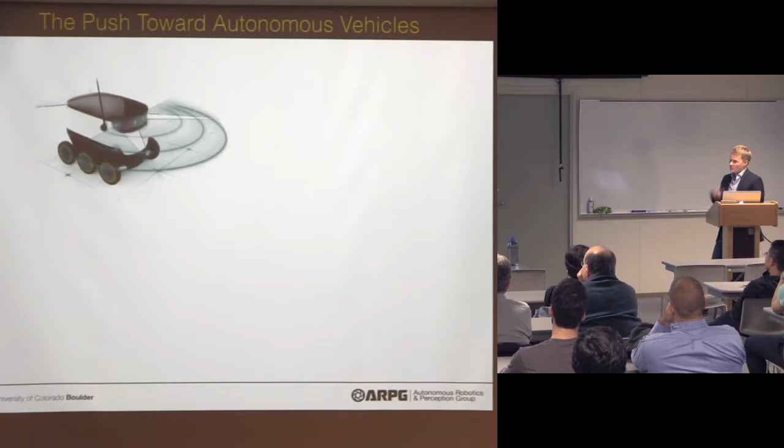So this is one robot, from Starship Technologies, founded by the same people as Skype. Basically it can go for a 3 mile radius around one area. It's pretty impressive, but as you can imagine, driving on the sidewalk and waiting for good weather is kind of different than those on-demand activities, like getting people to work. So that's just one thing to bring up.

And then also there's these parking considerations. If you've thought about what a fleet of autonomous vehicles would change in our daily lives, here's a picture of Ithaca and all the different parking structures you could pay for using the Park Mobile app. Basically every single one of these would likely be unnecessary, or at least all but 5% of them, because the cars would have far more usability and would constantly be in use. All they would need to do is park at night, essentially, when no one's using them.

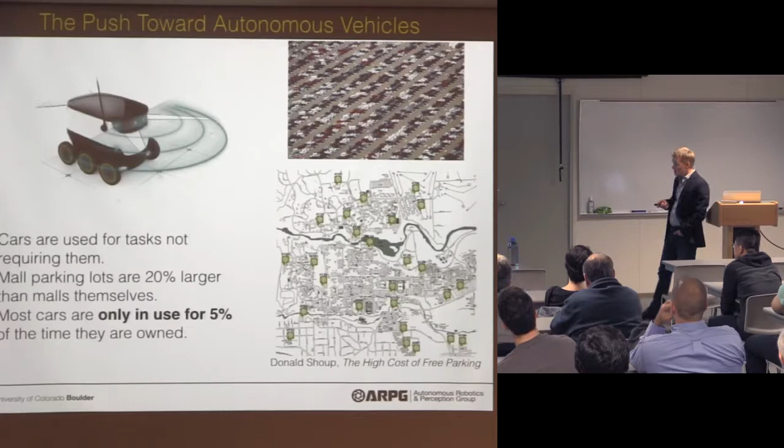So some really sad facts about cars in general: mall parking lots are 20% larger than malls themselves. Most cars are only in use for 5% of the time that they're owned. And frankly, most tasks don't rely on cars at all.

And then the federal government is also pushing a lot of money through, $4 billion to be spent over the next 10 years. The hope is that 25,000 deaths could be avoided just by trying to get people out of the car when they're making less than adequate decisions. It's not so much that we think humans are bad drivers. In fact, humans tend to be pretty good drivers as long as they're not looking at their phones, as long as they're not tired, and as long as they're not drunk. So when we look at the kinds of standards we'd like for our own self-driving vehicles, a human on their best day is pretty much as good as we can get.

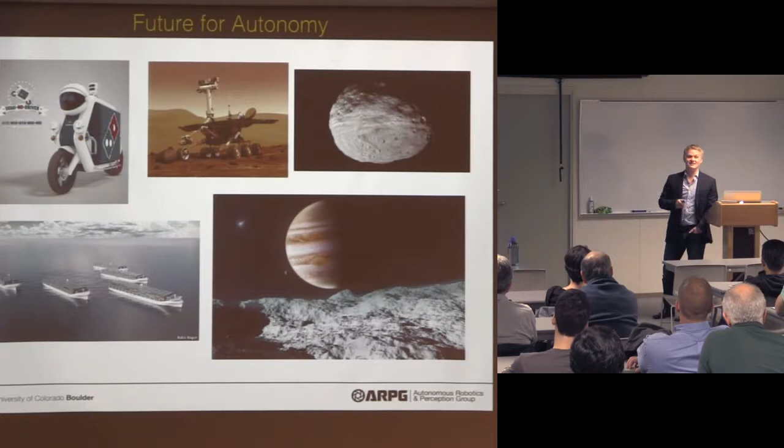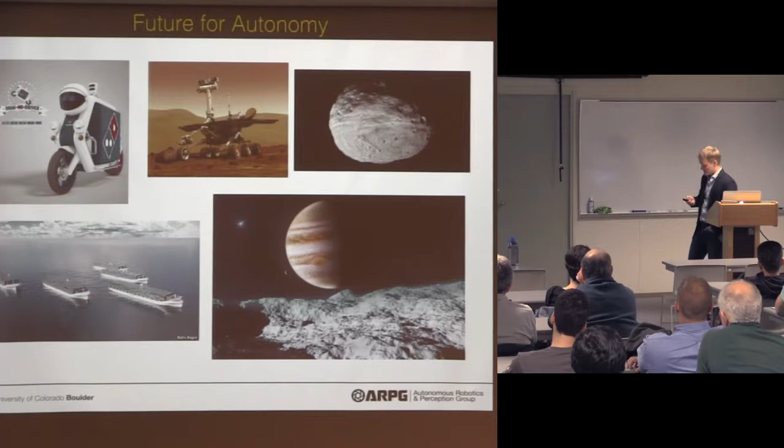I've kind of alluded to this so far, but now I'm going to spell it out. The biggest challenges associated with full autonomy are perception—the ability to actually perceive the environment using low-cost sensors, or at least some sensors we can send up or deploy on any kind of robotic platform.

We have the control problem. How are we able to navigate a surface like Europa when it's all icy and there might be jagged edges? How do we model the dynamics of some vehicle driving on that surface?

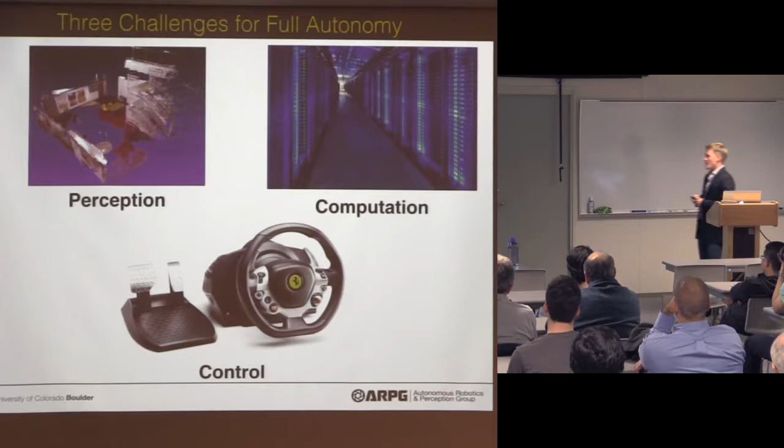And then finally, compute, which we can't rely on. We can't rely on having unlimited compute, or that at some point compute will scale such that we can run these algorithms, because frankly we might not have that kind of chance or choice in the case of going to these extraterrestrial circumstances.

This is not what Uber is doing when they send their cars out on a sunny day in Pittsburgh. This is not what Google's self-driving car does when it's driving around Mountain View and Arizona, where it never snows, and they can basically just test it on sunny days. What we're interested in are cases in which you might lose control of your vehicle—so there's an icy road and you want to be able to detect and respond to it appropriately.

And then finally, what happens when one of the changing models, or a model, changes? For instance, we get a flat tire. I highlight two graduate students of mine that are helping me on this project, as well as some of our funding agencies that are supporting this.

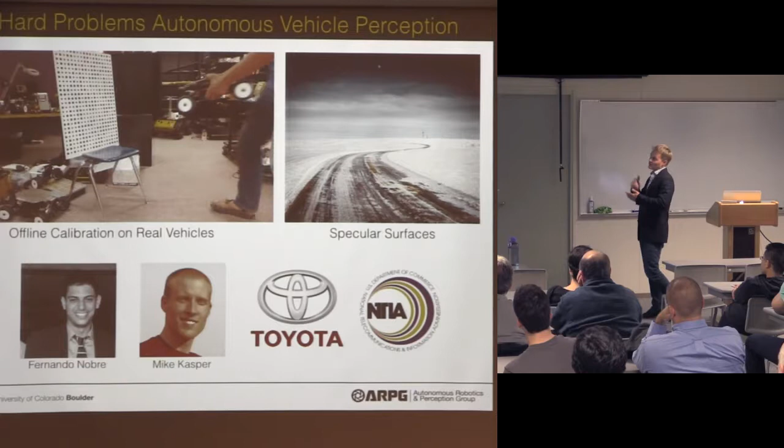I'm also going to talk about this one problem related to the offline calibration of current sensor systems. For those of you that work with any perception algorithms, this is actually a really, unfortunately, common occurrence in which you take a robot, no matter how large it is, and you wave it in front of a calibration target in order to determine intrinsics of the lenses, to be able to figure out how lens distortion comes into play, how spread apart these different sensors are, the cameras and the inertial measurement unit on board. And what happens if, for instance, something bumps and all of a sudden those calibration parameters come out of whack.

And also this specular surface situation, again, icy roads being a really great example. Specular surfaces are surfaces that reflect light, so you can imagine a mirror as a perfect example. These tend to be challenging because then we can't even determine whether or not it's a surface we're looking at or a reflection. So how do we programmatically determine that?

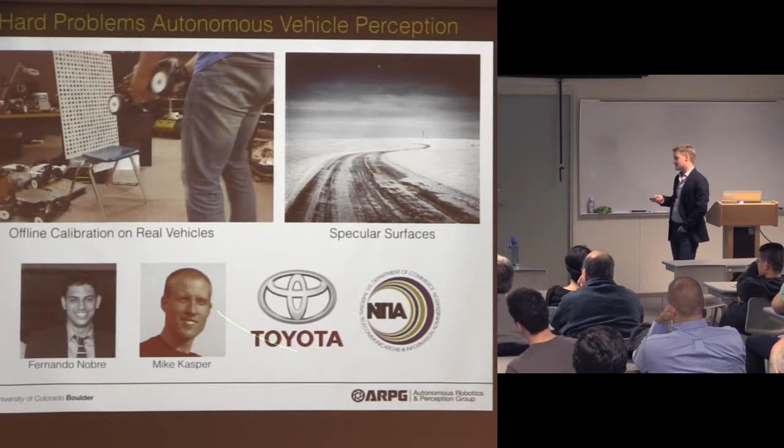Two students of mine who have been aiding me on this project, Fernando Nobre and Mike Kasper, will be graduating within the next 2 years, and then some of our funding agencies, including the Department of Commerce. Why are these problems unsolved?

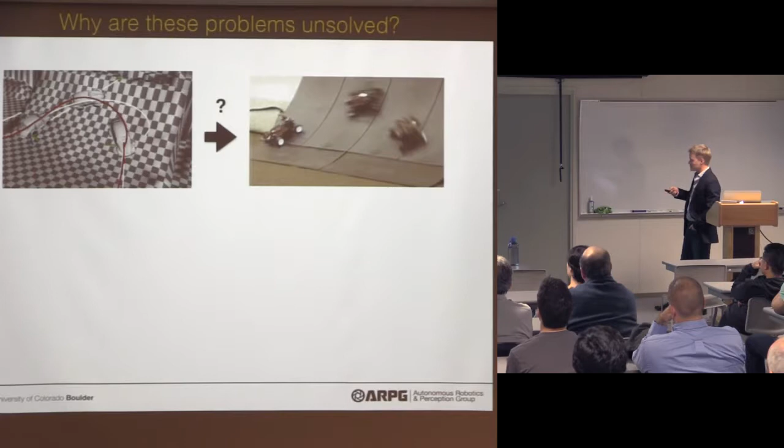Well, we can do as much as we want in simulation. Putting it on a real vehicle is actually really challenging for these, because real life is not this, it is more like this, as we are seeing right now outside.

Not only that, but many of these sensor vehicle environment parameters must actually be estimated in real time. So what do I mean by real time? This is a very important consideration. It means, at least in the context of this conversation, I mean in constant time. That means that if we're willing to do it on our computer, that's fine. That just means the problem can't scale with any parameter that we're trying to estimate, or with any sort of difficulty or challenging situations that we're going to be incurring or applying our algorithms to.

So for instance, we need to estimate, as I mentioned before, lens intrinsics, some radial distortion parameters, as I'll indicate in a little bit, biases and different kinds of standard deviations of noise on our sensors, as well as vehicle environment parameters, things like any conditions or any kind of parameters related to changing vehicle road conditions. You can think of tire damping parameters, braking force slope as being part of that. And what I mean by this particular area is, if we're operating in any kind of environment, we need to be able to estimate what that parameter, or what that environment is, in order to apply control to it.

So I'm going to start by talking about this vehicle control situation, and lay out this one kernel of an idea that we would like to solve. That is, we would like to drive a real car over some terrain park with some challenging features in it. For instance, there might be a jump right here, there might be a loop-the-loop. This is obviously not indicative of a real driving scenario, but it's challenging enough such that if we can do driving here, we would like to believe that we can do driving in most other circumstances.

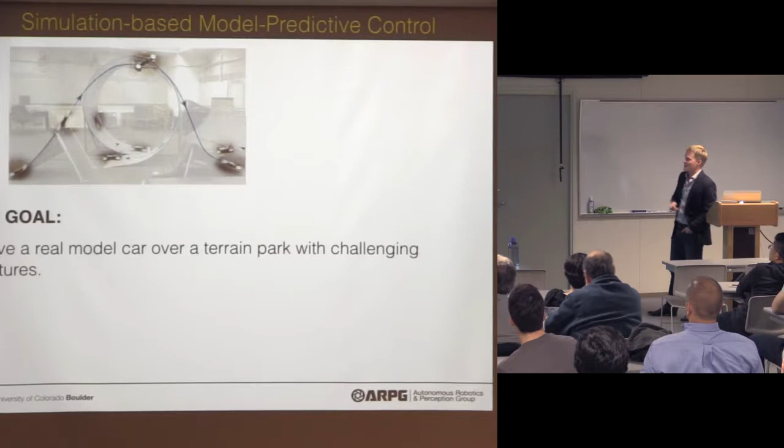And the approach that we're going to take is we're going to capture a model of this terrain park and then determine how a simulated car would drive over it. And then if the car that we're modeling is similar to the car in the real world, then we'll just send those commands that we're calculating on our computer over to the car. And we want to see how that works.

Now, there are a lot of concerns that one might have about this approach. For instance, what kind of high-order model do you need in order to simulate real car dynamics? Or maybe, are perturbations from the car model going to actually approach this real car that you're going to be driving? And as in robotics, I'm going to suggest that we run an experiment and answer that question through the experiment. Okay.

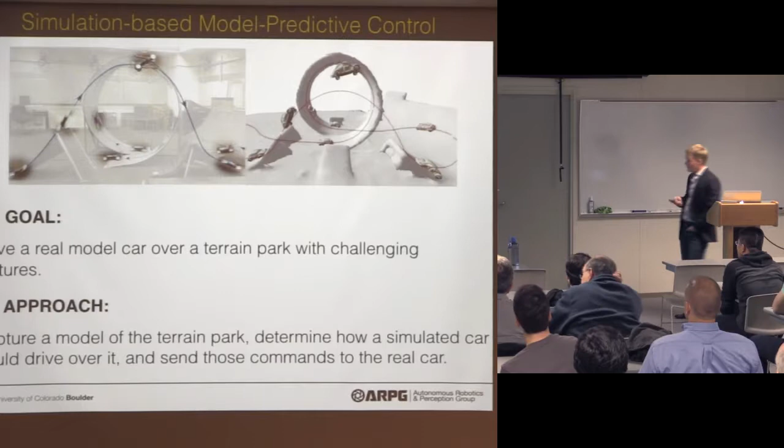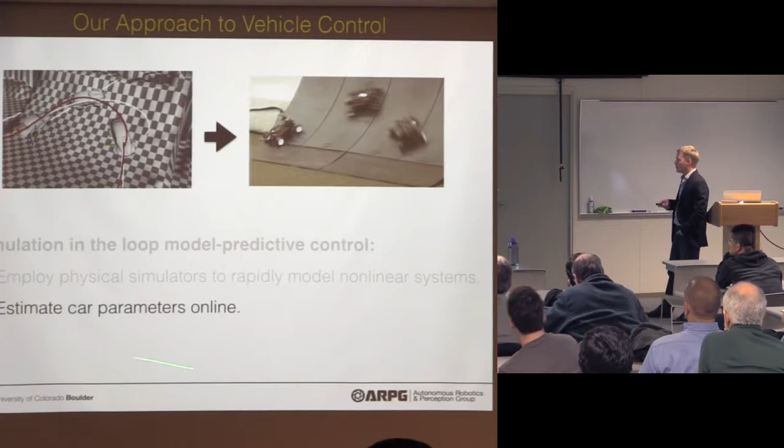Our approach uses simulation and receding horizon model predictive control. First, we'll employ a physical simulator that will rapidly model any nonlinear system we give it, in particular this high order car model we wish to model here. We're also going to estimate car parameters online, all those different vehicle and environment parameters I mentioned before.

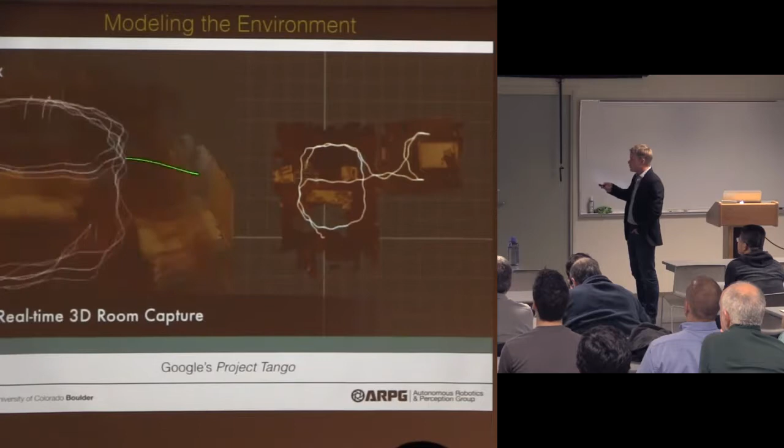A quick primer: I mentioned I'm going to scan the environment using an algorithm that's been well known in the computer science community for the past three years or so. What's going on here is one takes a Microsoft Kinect and walks it through a room and series of rooms, generating this 3D world environment. This 3D environment exists in your computer in a scale-correct way, and as we walk through with this sensor, if we have a 3D model, we can simulate physics in this environment.

We've applied that algorithm to data we've collected from the Kinect, and we went ahead and decided, okay, let's put a car down and tell it where we want it to go. We drop these waypoints, and I'll explain how these different paths are generated. But at least if I start physically simulating the car in this environment and say I want you to be able to jump, and give me ideas of how you're going to jump, this is the result. Clearly we can make a car physically simulate jumping over a certain feature.

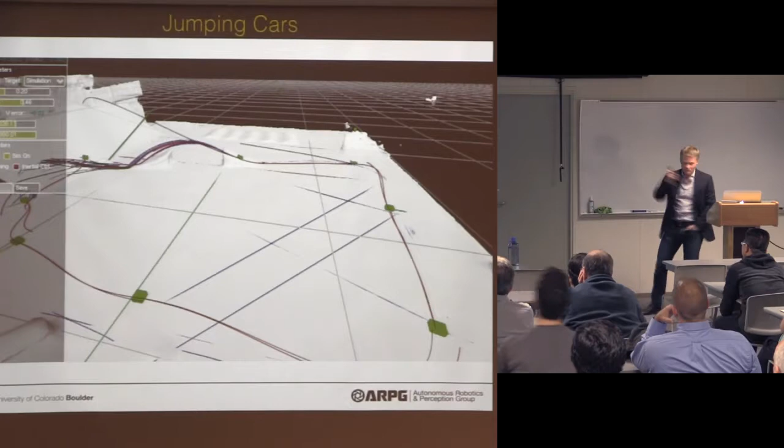Is this video on loop, or is it going around and around? Oh no, this is actually going round and round. It doesn't look like the model's improving as it goes, like the explorations are not converging. Not converging how? There's a spread as it looks forward. The spread doesn't get less as it goes around. So you're probably asking about online parameter learning or something. I thought you said that a minute ago. Yes, I did. The online parameter learning we're doing is associated with this terrain. In this case, I fixed the parameters.

I'm not doing any learning in this example, so I should mention that, and I have some demonstrations later about results for online parameter learning. However, I basically just wanted to show this one example of what's going on, and in particular I wanted to show these control candidates as they're being generated.

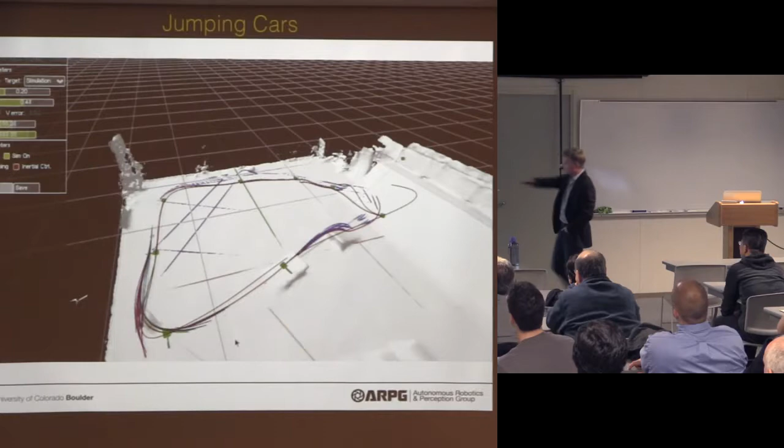Let me quickly show this again. You'll see these lines shooting out from the vehicle. What's happening is we're forward simulating the dynamics of the vehicle, looking ahead about 0.2 seconds, solving the boundary value problem associated with this vehicle to try to regress it towards this red planned line. These control candidates are generated at about 100 hertz, which means we can generate forward-looking trajectories extremely quickly and regress them to learn the correct control candidate, then apply that to the vehicle.

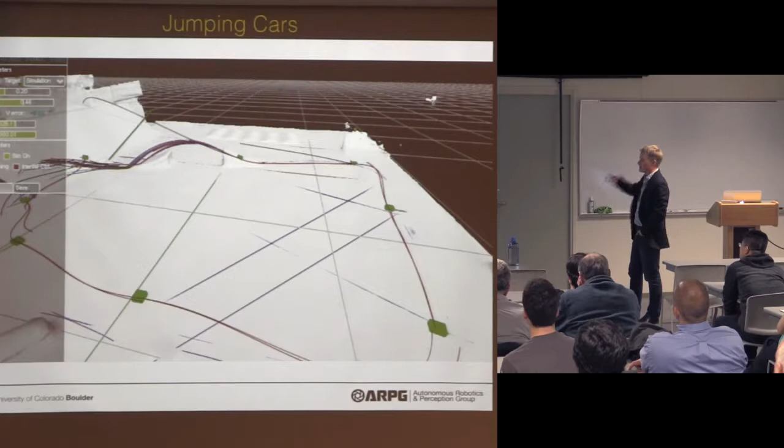That should answer part of your question, but not the physical parameters question. So the problem structured here: we have a dynamics model of this system, and we're trying to solve this series of boundary value problems. Like I mentioned, we drop waypoints, and we ask how do we get from this current waypoint to the next waypoint. We also have non-holonomic conditions that relate to certain constraints we have on our vehicle.

So just to go through here, we have the system dynamics as modeled. There's the state of the vehicle, and there's also an environmental parameterization, something like those parameters that we might be trying to estimate online associated with the environment, things like coefficient of friction between the wheels and the ground. We also have that at time t alpha, some time into the future, we would have a state of the system at waypoint alpha.

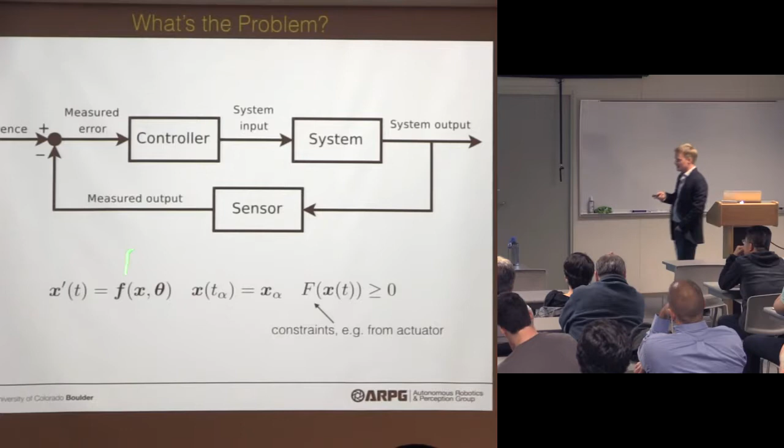And I mentioned some constraints, e.g. from the actuator. You can't turn that quickly on a car, and you can't express those conditions necessarily as this vector field, so we need to have some of these non-holonomic conditions. All right, so there are some challenges associated with this, and I want to be upfront and very clear about it, because as with all methods in robotics, the hope is that this works, and there are cases in which it doesn't, and we should be clear.

So F is nonlinear, very high order. We basically are deciding to model this as high order as we want. If we choose T alpha in a certain way, this boundary value problem may not have a solution, which means that we'll do a regression algorithm on a problem that has no solution. Also, these generally require some sophisticated numerics, which would result in non-real-time behavior. So that's obviously a problem, and we need to address that directly.

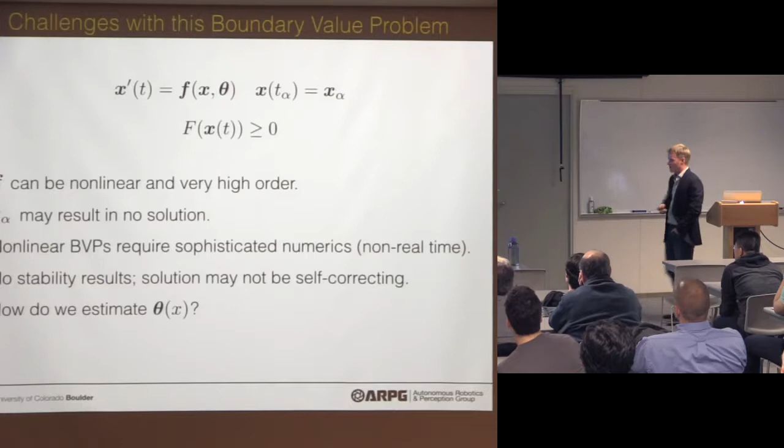There are no stability results on solutions like this if we are using a numerical solver, and that means that the solution may not be self-correcting. If you are slightly off from the reference trajectory, then you could drift away from it for a long time. And finally, how does one estimate this theta of x, which Andy Arena just mentioned, I believe.

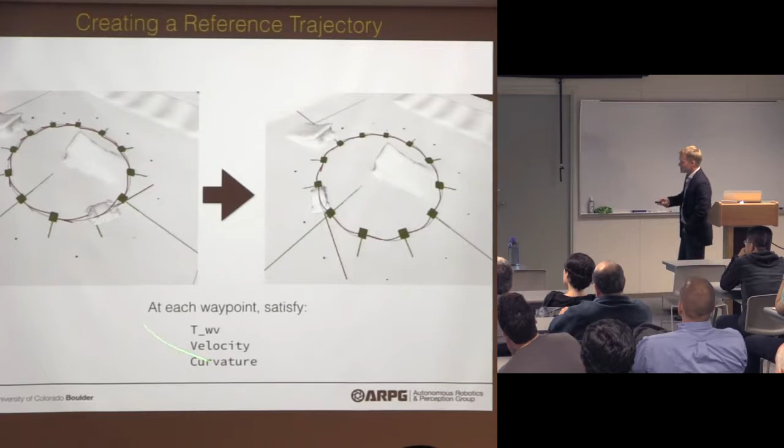Okay. So first, we create the reference trajectory, which I've referred to a few times already. We drop these waypoints. We say that at each waypoint, we are going to satisfy some pose, which is x, y, z, roll, pitch, yaw, velocity, and also a curvature constraint that's related to essentially how the wheels are turning at that one waypoint. And this can be solved by employing this physics simulator, as I mentioned before.

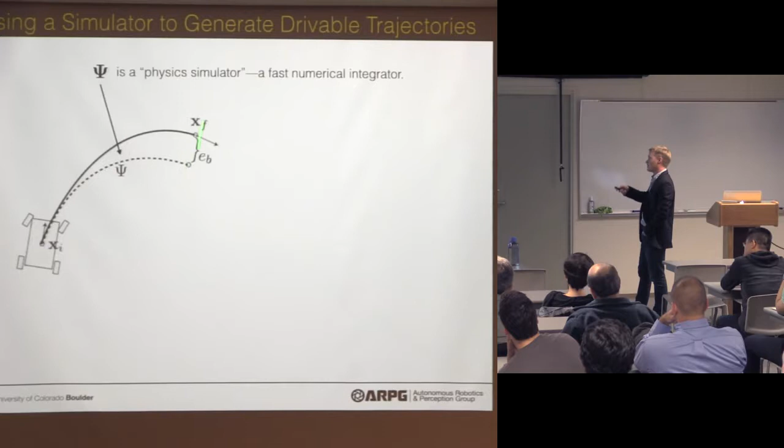So assume that you have some waypoint of your vehicle, x sub i, and that you're trying to get to this next waypoint, x sub f. We employ the physics simulator in order to forward project dynamics over a certain time length. And what we might end up with is some trajectory that does not exactly get us to this x sub f. So what do we do? We use optimization on this problem. We're trying to drive e sub b to 0, and we set up this residual.

This box minus operator is related to an SE3 pose difference. Note that in XYZ, it's just going to be a difference between the degrees of freedom, x, y, z, individually. But if you're trying to take a difference between roll, pitch, yaw, then that requires some more sophisticated handling. And for each waypoint L, we're going to solve, quote unquote, this boundary value problem via parameterized curve, which I'll explain in one moment. And then we're going to minimize this e sub b.

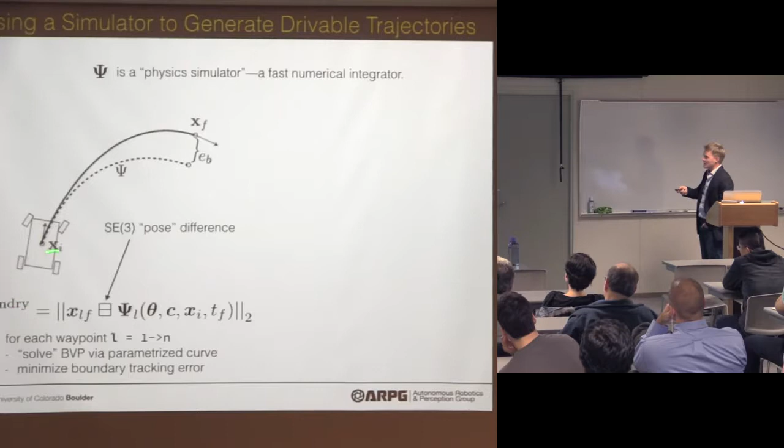So we're setting up an algorithm that hopefully will get us correct control inputs C in order to solve this problem, with everything else being constant. So what are you using as the boundary value solver? So the boundary value solver is actually a forward projection of dynamics in time, and then Gauss-Newton optimization on this residual e sub b, using as a parameter optimization set some parameterization for the control signal. And in this case, we use Bezier curves.

If we use fifth order Bezier curves in space and in velocity, then we can fully define all of our angles associated with the rigid body motion and solve this problem in only a 5-dimensional space, which is a lot easier than trying to solve the finite difference problem. We tested out a bunch of different curves. Spline curves, for instance, result in too high of curvatures, so we went to Bezier curves because they demand a nice smooth curvature change with minimum curvature.

We can explicitly say that certain kinds of maximum curvature bounds exist on a Bezier curve, so it turned out that that was sufficient. Other people use Dubins paths in order to solve these non-holonomic vehicle problems. And can the control signal steer angle? Yes. So I should mention there are two inputs to the system. With any car, we can steer it, and we can put our foot on the gas. We can also brake, but I'm ignoring that for now.

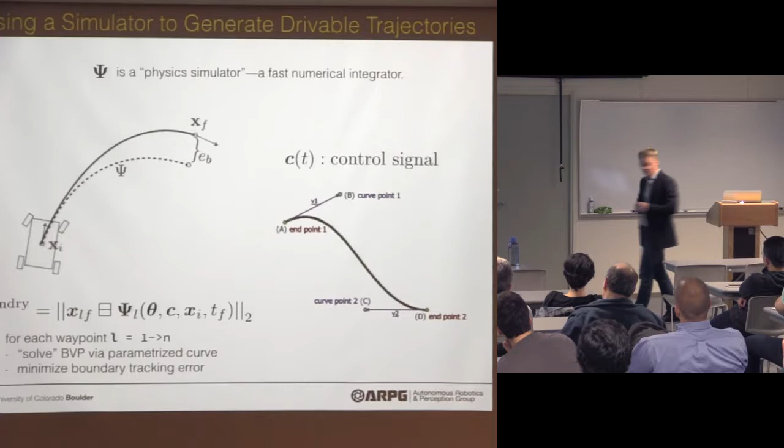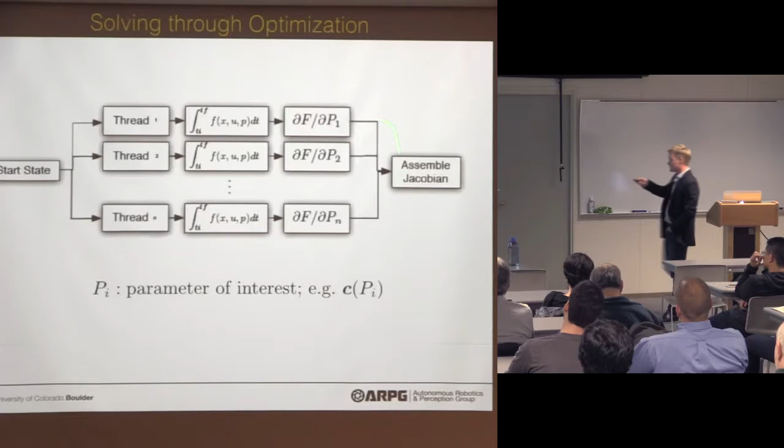So those are the two kinds of control inputs that we have: voltage across the motor, and then turning rate or turning angle. Okay. So we can solve this problem also in multi-threaded fashion. Basically, you can do this integration of dynamics on each degree of freedom for the optimization. So this control signal, as I mentioned before, is now parameterized according to some p value, so just a number. And we can, for each different number, run a physical simulation and use finite differences in order to calculate a Jacobian and invert that in the end in order to solve for that optimization problem, which is exactly what we do.

And so we set up this control problem such that we're trying to move our vehicle to this reference trajectory, but over time, future time horizons are going to be downweighted, and mostly we're going to be looking at this error in tracking this trajectory as it's temporally relevant, the moment that we're in right here. Okay. So we set up this other residual that's associated with trying to minimize the control problem, which was what was being solved by those candidates that were being shot out from the vehicle before. Okay. And like I said, we can solve this problem at 100 hertz. Turns out we only need to solve the other problem once in order to generate that reference trajectory, as long as the vehicle parameters aren't changing.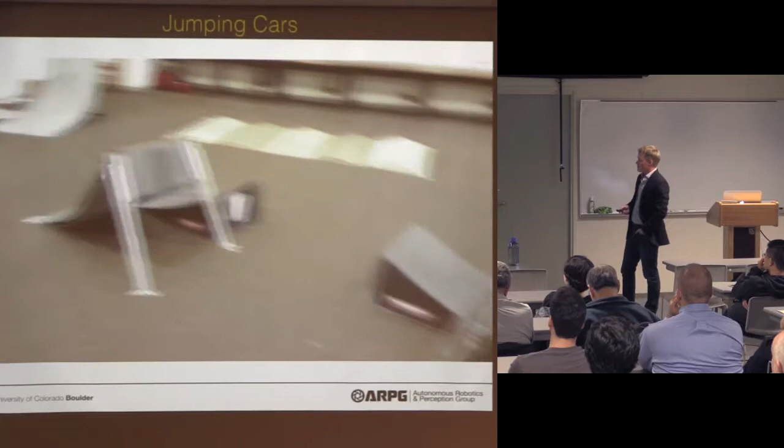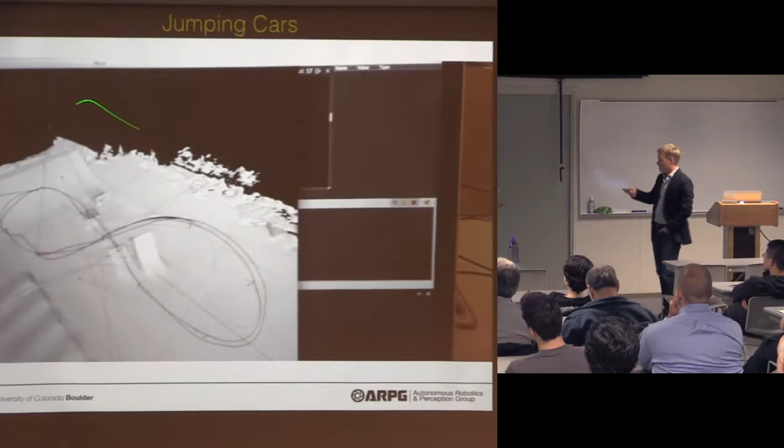Okay. So moving right along, I want to show you what this looks like when we actually put it on the vehicle. Because all I've done so far is sort of demonstrate to you that, okay, we can go ahead and apply or calculate these different reference trajectories, as is going to be shown on this software cutout right here. Here's the reference trajectory. Here's the vehicle with state feedback being provided by a motion capture system in our lab. And essentially these control signals are following this reference trajectory and being calculated at a very fast rate, such that state feedback is immediately being included in the system.

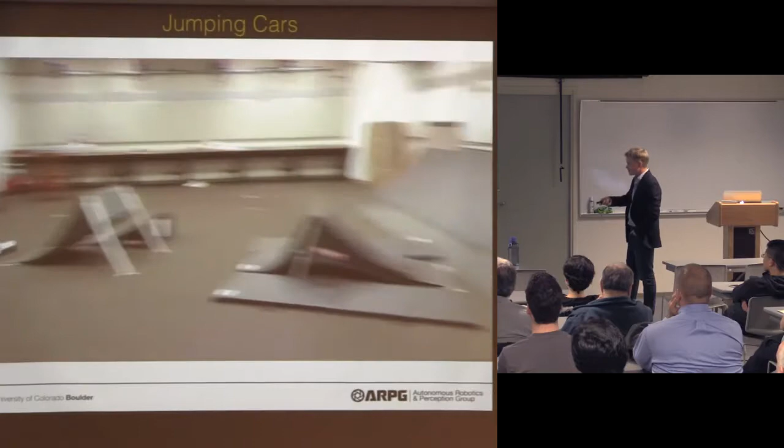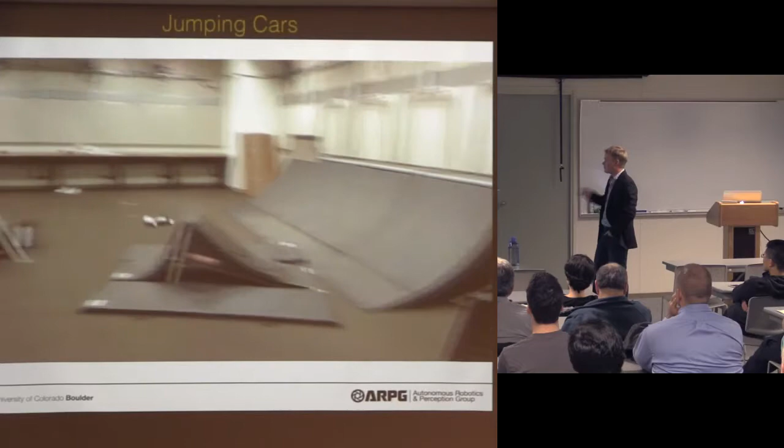All right. And so at least in accomplishing something simple like jumping, this might sound kind of uninteresting, right? Well, at least for that low jump. For the high jump, we have a different story. So what we've done is we've placed a waypoint on one jump over here, and then this other jump right there. So a human operator might be able to land this vehicle without crashing it. A human operator is less likely to be able to actually land on this opposing jump repeatedly. And so this is the kind of behavior that we'd like to see, and we're kind of happy about it.

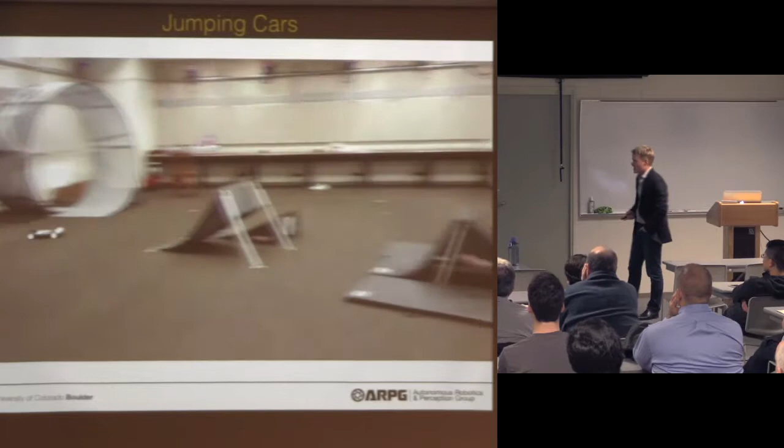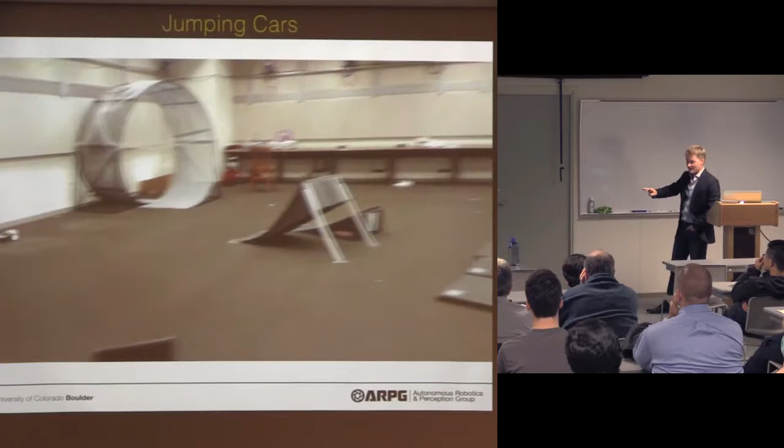One thing that is actually not present in this video, that I can actually show it to you afterwards, is there's some audio with this video. You can hear that on this vehicle, the rear wheels are spinning as it's landing in order to stabilize it so that it's pitched up as it's landing and the rear wheels fall first. And that is not some sort of behavior that we programmed in. That's actually what the physical simulator is telling us we must do in order for us to stabilize the landing.

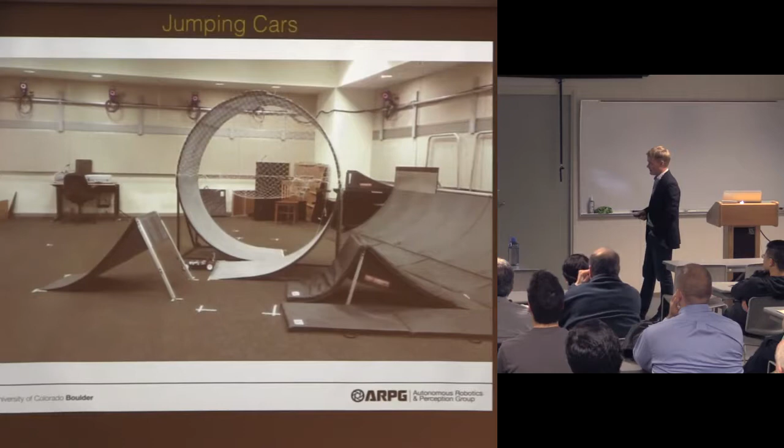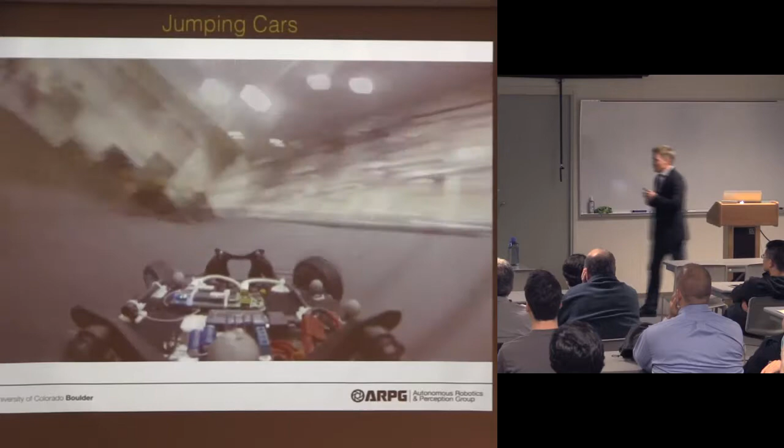And so this is sort of the last segment of this one little video right here. And as we go through this loop, okay, it can go through a loop. Well, you know, maybe a human operator could do that. Let's look at the front wheels as it's going through the loop. You'll see that there's a massive stabilization that occurs that is generally outside of the realm of what maybe a PID controller would give us. And certainly it's operating in a fast way. So we know that at least this method appears to work.

Now, I should also mention one thing, that the state feedback was provided in that video by these cameras, what I called motion capture before. The motion capture obviously loses tracking as it's going upside down, and in parts when it's airborne. And so there's also an inertial measurement unit on this vehicle, and we're forward integrating those measurements coming out of it, which is going to be the topic of my next section.

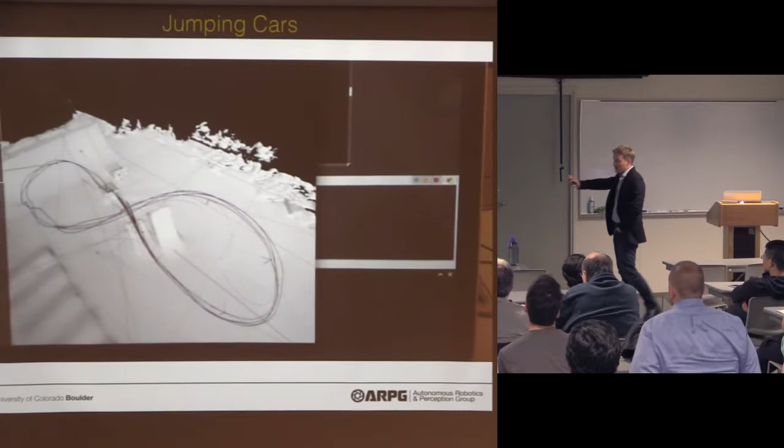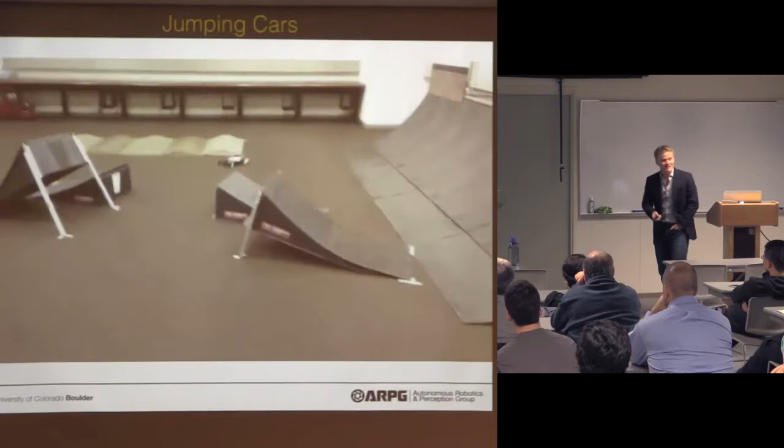But at least for now, this is the control problem as we're solving it, and we're looking forward to new ways of explaining this as it relates to real vehicles. I realized that I did not talk more about online parameter estimation, so I should talk to you more about that later if you like. So sorry about that. All right, so here are some takeaways that we have about that project and things that we want to look at in the future.

So first of all, complex models, they can be used to aid practical behavior, things about landing or skidding. The car was skidding in certain cases in that video. And those models allow us to actually determine how that behavior will affect our vehicle and then send appropriate control signals to it. I also mentioned learning for parameters can be done.

Something that I didn't mention at all so far is that we had to tune that model that we had, and we, in some cases, had to run the car and then use state feedback and do this optimization. I'm very concerned about that method, and this is the kind of method that's being employed by many real car companies right now. They drive their car and they empirically determine a parameter such as maybe the spring coefficient that's on their vehicle. I think that's dangerous because what that means is that we're opening ourselves up to overfitting, and we need to be very careful about that.

Okay, the third thing is for vehicles, some model uncertainties are addressable by state feedback. That is to say, we know we're not modeling the full behavior, the full dynamics of this vehicle, and at the same time, we still can drive the vehicle through these different cases. And so state feedback, I think, is helping us a lot there.

And so future directions, there are these different kinds of driver assists that exist. So ABS is one of them, and then electronic steering is another one, or electronic stability, as it's called by some vendors. These are systems that are generally black box systems.

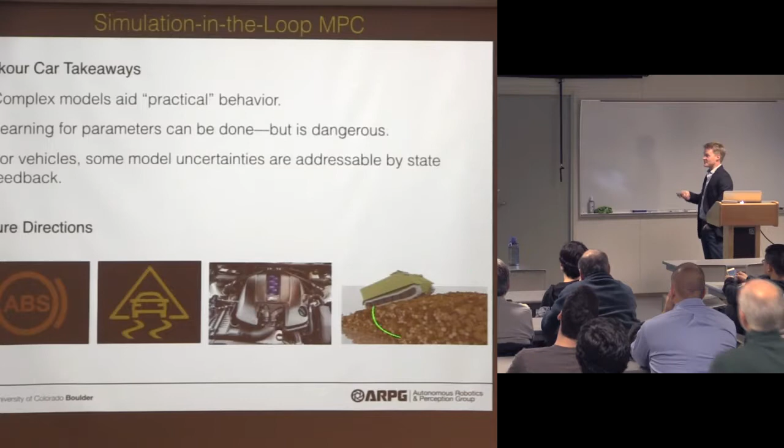So for instance, we do work in part with Toyota, and what they tell us is, some of these systems are given to them, and then they must characterize them in some way, but they're not necessarily given the guiding behavior of these systems. We want to be able to model those systems and then put them on our vehicles so that we can appropriately do planning with them. And then I also mentioned black box engine models, as well as granular materials or other kinds of more complicated physical scenarios in which we might be driving.

Now I want to switch gears and talk about this second difficult problem in self-driving, which is vehicle perception. So vehicle perception is actually the driving difficulty, in my opinion, behind most autonomy. It's the ability for one to relevantly collect data and make decisions based on it from a suite of different sensors. And that is a very general problem.

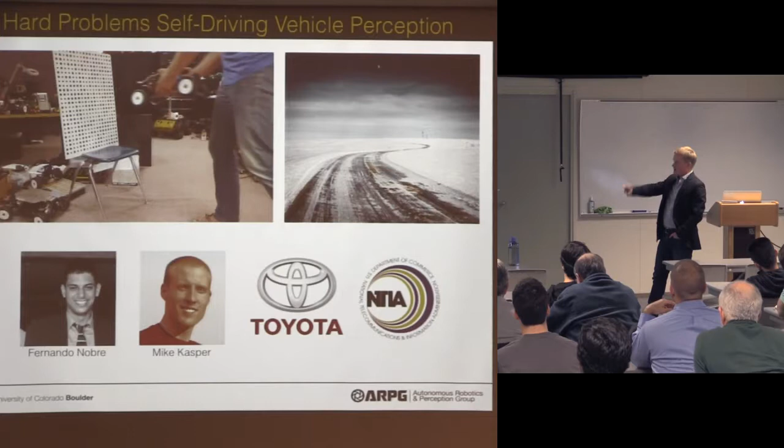I mean, that's the problem that ranges from being able to look at a police officer with his hand out, and infer that means that you're supposed to stop, something that's generally considered a nearly artificial intelligence level problem, although deep learning's gone a long way to try to solve it. The second kind of issue is related to how these sensors even react with respect to one another so that you can know where you are. And so that's one that I'm going to be talking about in depth today.

So this vehicle that's being run through this calibration process that is looped in this case, there are 3 different cameras on it, and then there's this inertial measurement unit. And to talk a little bit about how we would be able to do navigation, I draw this graph here. Okay, so this is a relationship between cameras that are sitting on some vehicle or a robot, and a set of calibration parameters here that determine the offset between, let's say, this camera and then an inertial measurement unit. So this is an accelerometer and gyroscope again. What it does is it gives us data that we can use and integrate in order to get motion estimates.

Typically, as a camera is moving through a scene, you detect some points in the scene and project those into the camera plane, and from there determine where these world points are, things like corners in the world. But the IMU, as it's mounted rigidly to a robot, is also giving you accelerometer and gyroscope measurements, which in part give you the same information as the camera, offset by this transform.

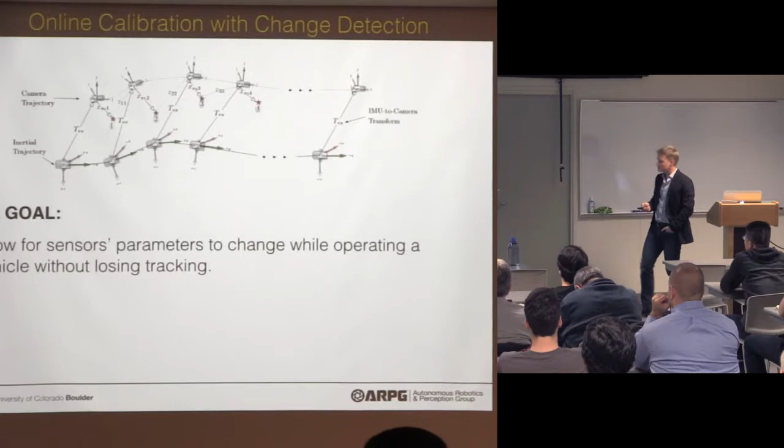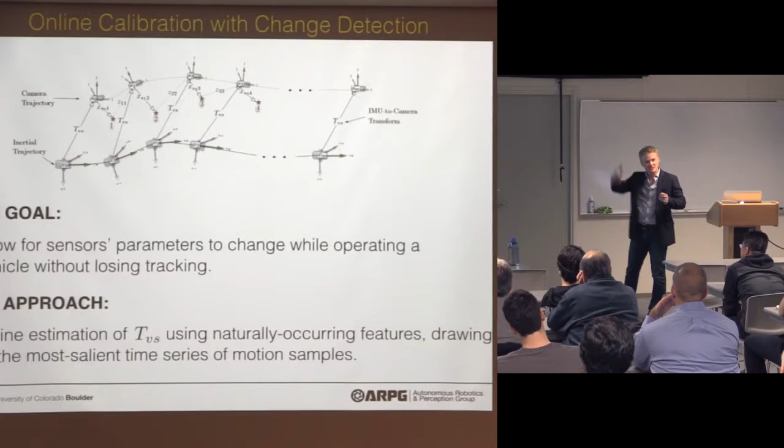Our approach is to do online estimation of this transform using naturally occurring features and drawing on the most salient time series of motion samples. That is, we take large amounts of data with these sensors, and from that time series of data, we cherry pick the best sequences for estimating what those parameters are. Here are some different motivations of why this would happen.

There will always be erroneous driving, even when computers are driving these cars. If you end up slightly jostling the chassis of a vehicle, you cannot assume the parameters of those sensors will remain the same. Not only that, but if they were off, what would happen? Let's say you decided your sensors are out of whack and you're going to stop the car. Sometimes stopping the car is not an option—you could be on a highway, in the middle of nowhere—so there needs to be some system that actually recalibrates these sensors as you're going.

So these are two examples. I showed you this video, and I can tell you that through this jumping procedure, there are portions of this vehicle that are going to be jostled and moved around. Even a millimeter of inaccuracy on a sensor rig, when that is propagated all the way out into some features in the scene, results in a massive error in terms of the state estimation for the vehicle, for instance.

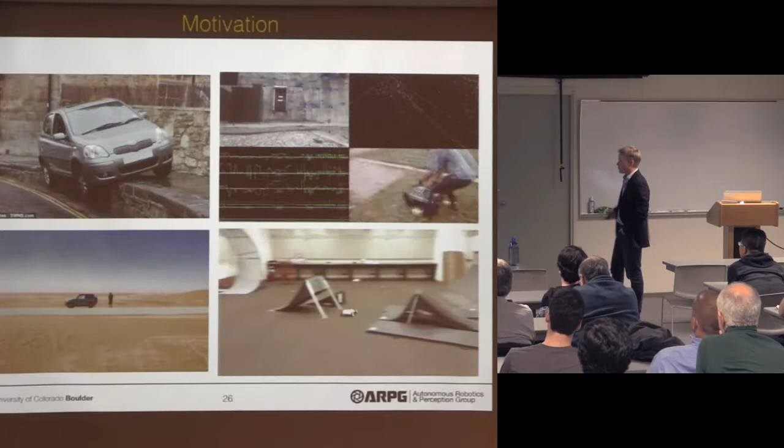And then there's this other example, where one of my graduate students is taking a camera and moving where the camera is on the robot itself. I'm going to get back to this video in just a second.

So, some goals: we want to develop power-on-and-go operation. This is the key of all robotics right now—that we would not be setting up situations in which everything is perfectly done and then all of a sudden we're ready to run our experiment, it only runs once and then we can never recreate it. We want to avoid that kind of problem while also accomplishing the solution to this simultaneous localization and mapping problem.

We also want it to be robust to intentional and accidental changes. We want to be able to easily add and remove sensors from an algorithm like this. And finally, the biggest set of parameters we would like to estimate are the 6DOF transforms associated with the rotation and translational offset of cameras and the inertial measurement unit.

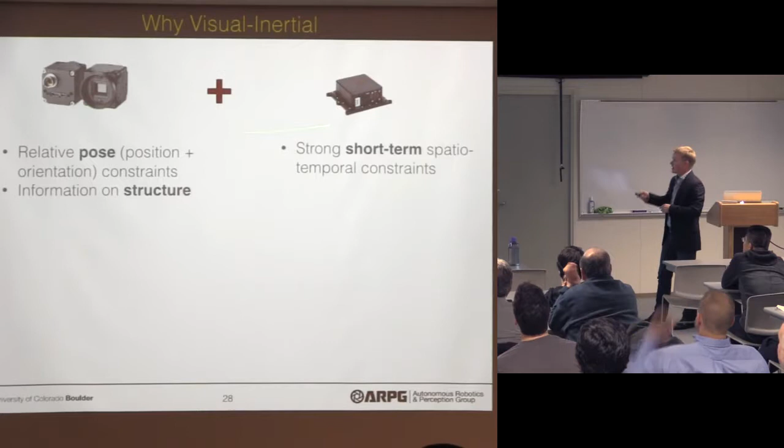So, really briefly, I'm going to talk about these two sensors. One, cameras give you relative pose constraints. That is to say, we're going to be able to look at where a robot is in one frame, slightly move, and then be able to determine where it is in another frame based on the motion of certain objects that are within the field of view.

And it gives you some information on structure. That is to say, we know where these desks are because we're able to look at the corner of this desk and notice that the perspective of this desk is changing when you have a set of two cameras, for instance. So IMUs, on the other hand, what they give you are these strong short-term spatiotemporal constraints.

Why is it short-term? Because IMUs tend to be extremely noisy, even very expensive ones. So while cameras are extremely repeatable and there's a wealth of data, IMU, on the other hand, gives you sort of noisy data, but gets you through these portions in which you're losing tracking. So let's say that it were dark in some area of the scene, or maybe you were looking at a white wall.

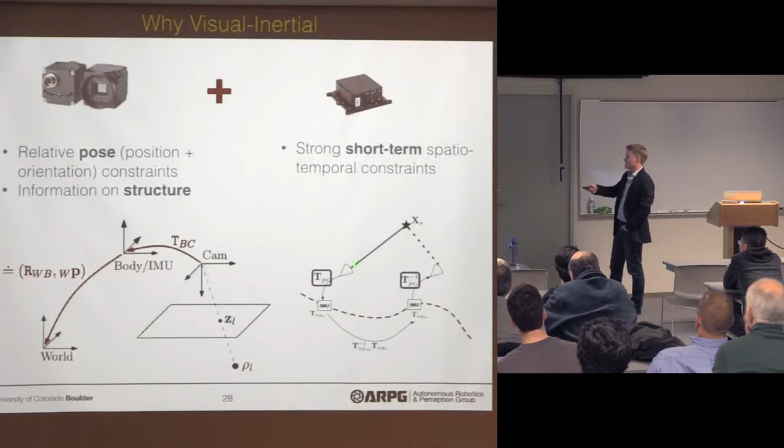Cameras can't really tell you much there, but IMUs at least can. Okay, and I give this example here, or this graph here, to show you exactly what it is we're estimating. So assume that there's some sort of feature in a 3D world.

So for instance, corners are very effective features. And when that feature is projected into the camera plane, then if we were to move the camera a little bit, then we would be able to determine how the camera has moved simply because we know we're looking at the same feature, right?

IMUs, on the other hand, you would integrate along this path, and then this would be the exact output of your IMU, and then you'd be able to determine, okay, this is some motion estimate. But now there's this T sub PC, which is the transform between the camera and this one point that the IMU is at right there. That is what is to be estimated.

And so we can see that there's a bunch of relationships saying that, well, this transform here should be equal to this transform here if we apply this T sub PC to it. And that is how we're going to end up estimating that particular quantity.

So some notes again. This implementation must be real time. We're going to be using some adaptive conditioning, that is the ability for us to change the length over which, or the time series over which we're going to be doing this online estimation. And we're going to be using some visual features in order for us to estimate the motion of the camera over time.

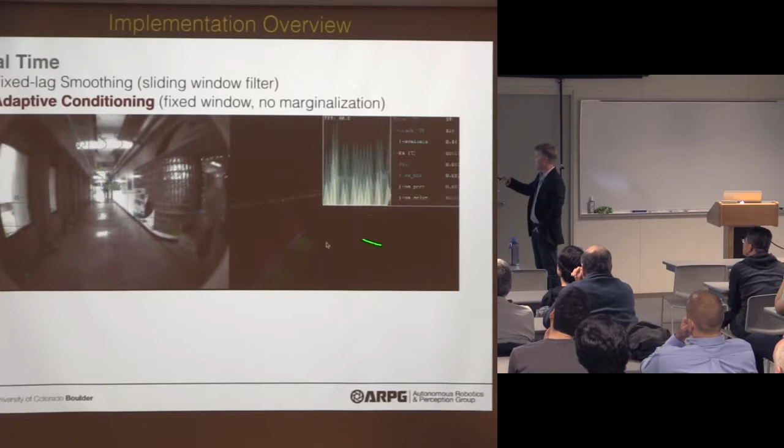We show these 3D world points that we're estimating over here, these boxes, show up as white dots on the right-hand side. And then these coordinate systems, these red, green, and blue lines that are orthogonal to one another, they represent the estimated motion as we're moving through this scene.

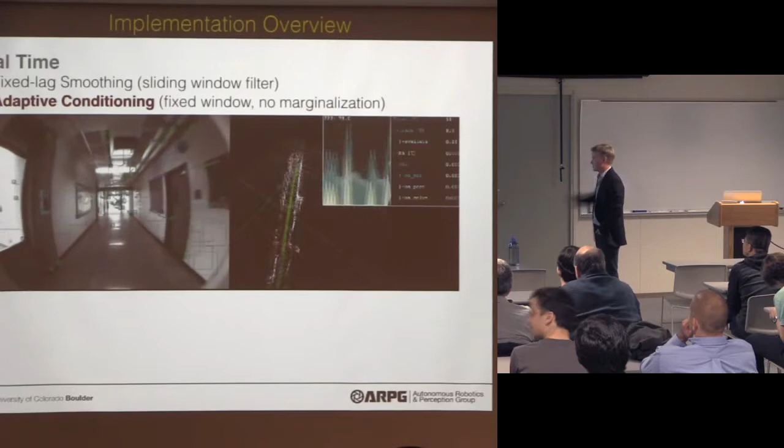Okay, so you can clearly see that this sort of algorithm works fairly well and is pretty common in robotics, just for mapping out something like this corridor. So you can even see the structure of the corridor here, and as you can see, there's also some noise that we need to be able to consider and handle in our algorithm.

All right, and so finally, I mentioned again, we're going to be doing an online self-calibration of these extrinsics. How does this end up working in our practical world?

So imagine you have 3 different estimated positions with respect to one another. And there's this candidate segment over which you're going to be estimating some parameter for those T sub PCs, as I mentioned before, the offset between your camera and your IMU. And from that estimation, you will end up with this number where you assume the parameters to be at, but you'll also get this covariance for this multivariate Gaussian distribution of the measurements that you've taken.

And so let's just say, okay, well, that's one possible set of parameters that it could be at, but it's somewhat noisy, so there's some covariance associated with that distribution. Now you add another pose.

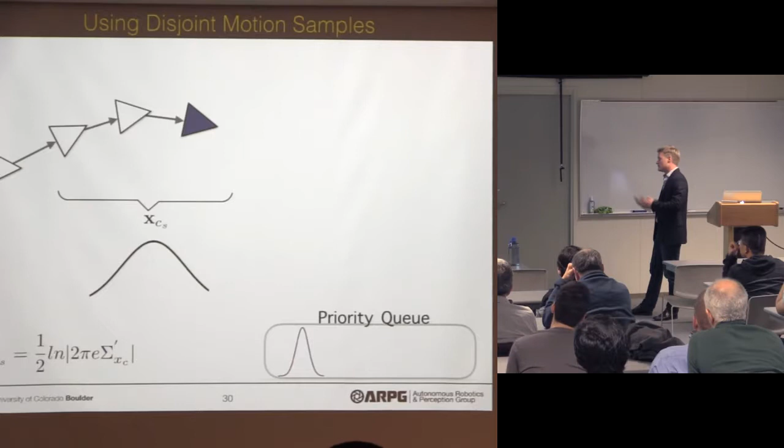You take the very next motion, and you say this is a new candidate segment, and now it's estimating some perhaps different mean, but with a wider covariance. That can just naturally occur based on, say, fewer features that have been tracked. So you throw that into a queue as well, saying this is one estimate, this is another estimate. You iterate forward in this fashion, and this next segment gives you a different estimation with a different covariance.

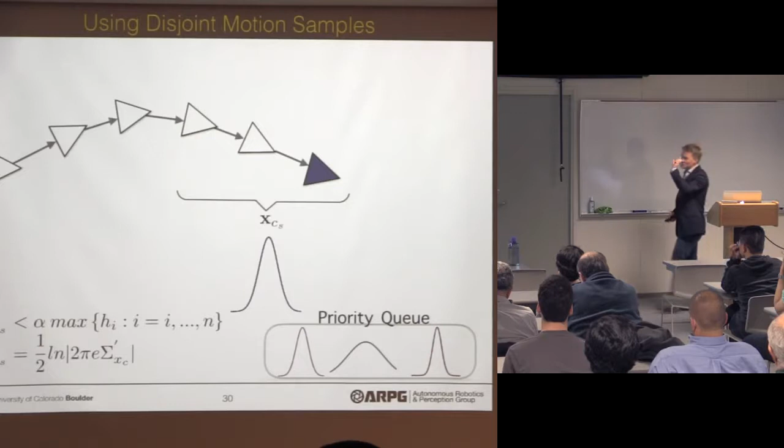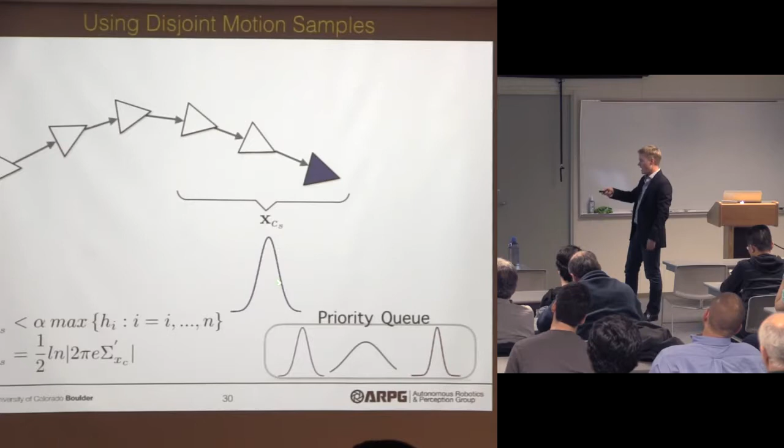The way this works in terms of capturing informative segments is we're doing a constant comparison between the current candidate segment and all the other segments in the priority queue. This priority queue represents those time sequences where we've been estimating parameters for the camera-to-IMU offset. In this case, the candidate segment has some mean with a slightly narrower covariance, meaning we're more confident in this measurement, and that kicks the lower confidence estimate out of the priority queue. So you're constantly strengthening this priority queue as you go, getting a better estimate of your parameters.

This one's rejected because it's not any narrower than these distributions, so this one goes. Okay, this one is also rejected.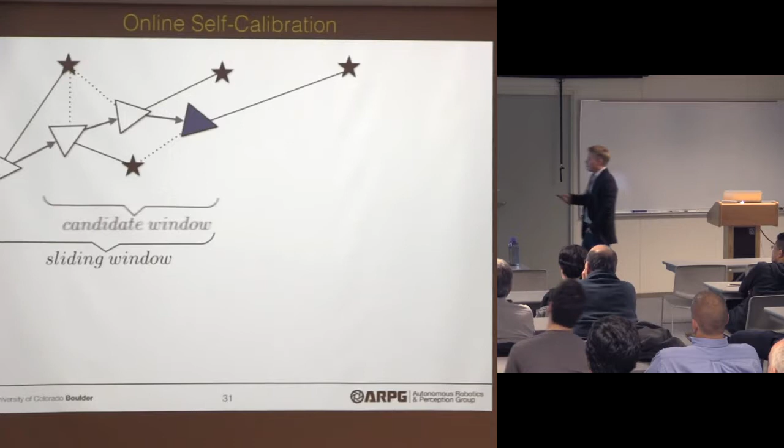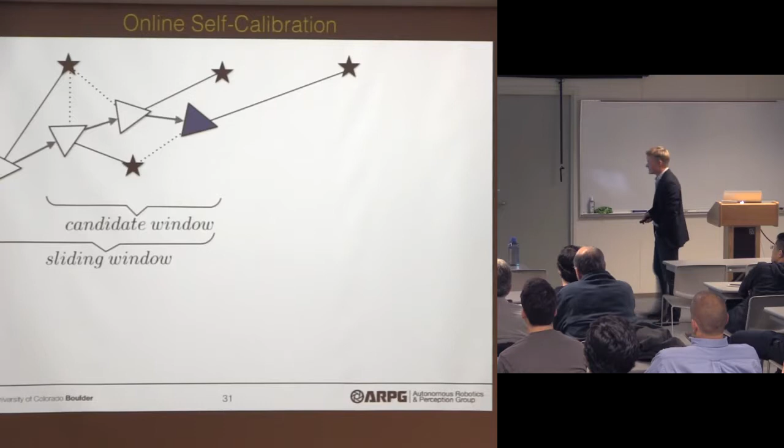As we move forward, here's another example. We would have these poses being estimated based on these landmarks. We're not only estimating the parameters I mentioned before, but also estimating our positions and the positions of these landmarks. It's nearly unbelievable that one can estimate all these different features at once, but with the different sensors coming into play, it is possible.

The way this remains real time, which is really the kicker here, is that as we're doing the estimation, we're no longer optimizing through this entire graph. Instead, we're optimizing over some sliding window. Notice this sliding window is completely separate from the candidate window, except that they both operate at the leading edge. The candidate window, as I mentioned before, is used to estimate those parameters, while the sliding window estimates the position and landmarks of your vehicle.

This is another representation of what this looks like. You can have different disjoint priority queue segments, and each one contributes to your understanding of what the calibration parameters are. On the other hand, you're always testing against this candidate segment at the leading edge — taking new information in to determine whether or not this is a better estimate for your calibration parameters. Now you can see this is a pretty full algorithm for estimating both system parameters and vehicle motion.

Now I'm going to talk about what happens when calibration parameters change. Notice we haven't really talked about that yet — we've just talked about when you get different informative segments.

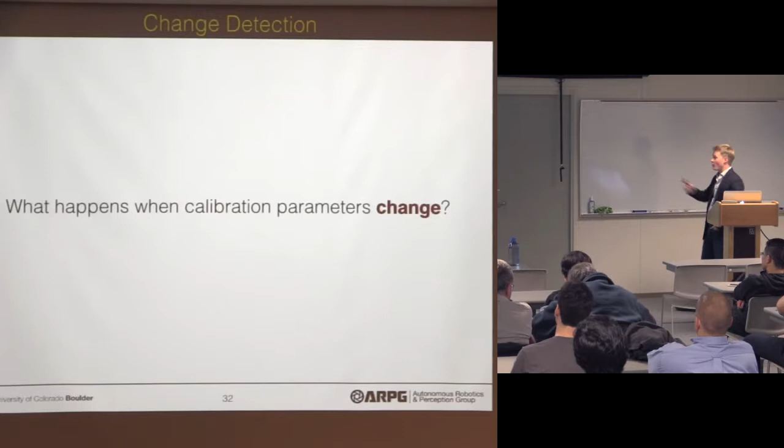So let's say we get a new candidate segment, as I mentioned before, and this is our current priority queue of segments. These all have means close to one another, though perhaps the covariances are different. Every time we collect a new candidate segment, we run it through a hypothesis test, which asks: what is the likelihood that this new candidate segment represents the same mean as these candidate segments in the priority queue? This hypothesis test becomes strengthened with even more segments being added to the priority queue. So it asks the question, do we have a 10% likelihood that this candidate segment could be part of the same set of parameters down here?

If the hypothesis is false and they're not equal, then we must clear the entire queue and use these new parameters. So practically speaking, this new candidate segment comes in, we get a new estimate of the parameters for our self-calibrating rig, and it's significantly different than what we thought before. What does that mean? It means all of these segments are now worthless, because they're all saying the parameters for the rig are set A, and now we believe we're in set B.

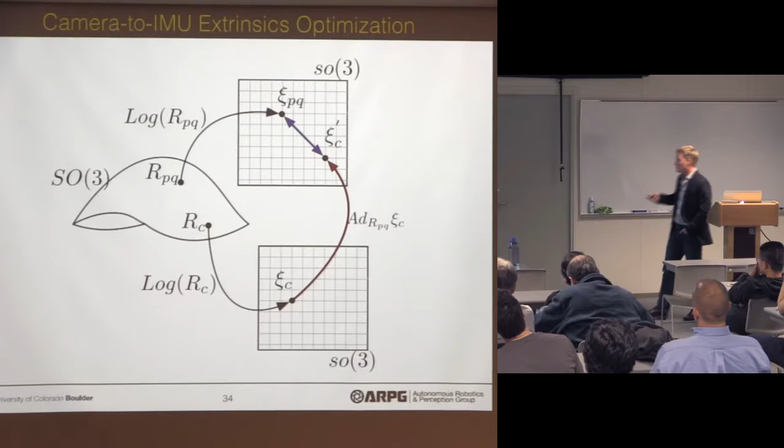All right, there's a quick caveat here. When one is trying to figure out the difference between two rotations, one does not simply subtract two rotation matrices. We need to lift this to a tangent space, and then use an adjoint operator based on the original SO3 manifold in order to subtract the two. That's the space in which we're doing optimization, and that's what I draw here.

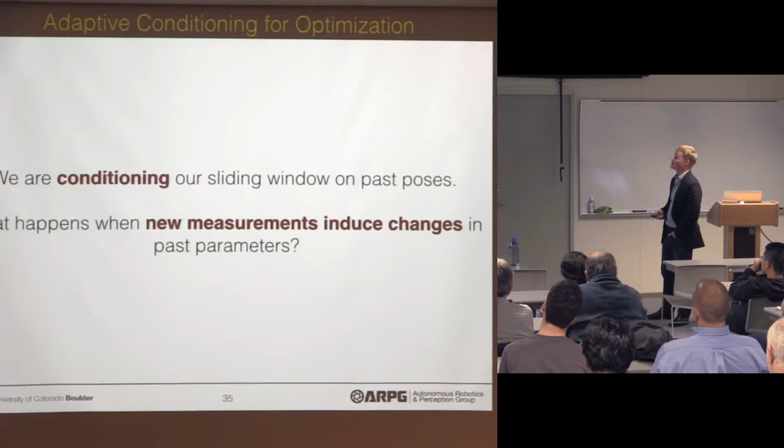Notice that I also said we're conditioning on a sliding window for past poses. And what happens when these new measurements come in that say we have a change? In that case, what we need to do is reapply the parameters we've estimated in the current candidate segment to those poses that were being estimated for position before.

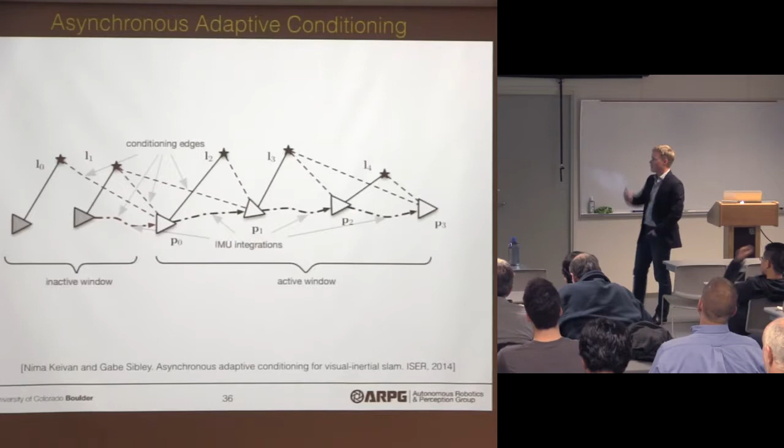This is sort of a post-hoc repair mechanism in order to make sure that the continuity of the graph remains the same. The way we determine that is we go back through each single pose and test whether or not the confidence interval around this one measurement is within 2 standard deviations of the measurement we expected it to be. If it's different, then we apply the new set of parameters to it.

This is the final slide of graphs that I have to show you. Essentially, here are the inactive poses over which we've set the values and we're no longer caring about what they are. On the other hand, these new poses, positions and orientations, are what we're going to be doing some amount of fusion into the current optimization for.

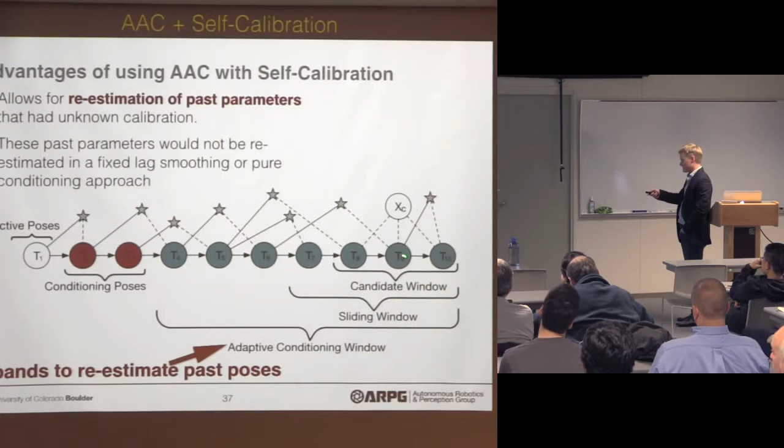And then you have these series of windows - this conditioning window that can change in size, that looks back and says should I expand this window in order to do the estimation. And then also different candidate windows that are being thrown into the priority queue. This can be done for different sensors.

So what Toyota is most interested in is what happens if I want to add another camera. The case goes that you can add some new sensor, we initialize it, and then we build our cost function in order to do the minimization of error on the pose graph. And then there's a different priority queue for each of the different sensors that you add in.

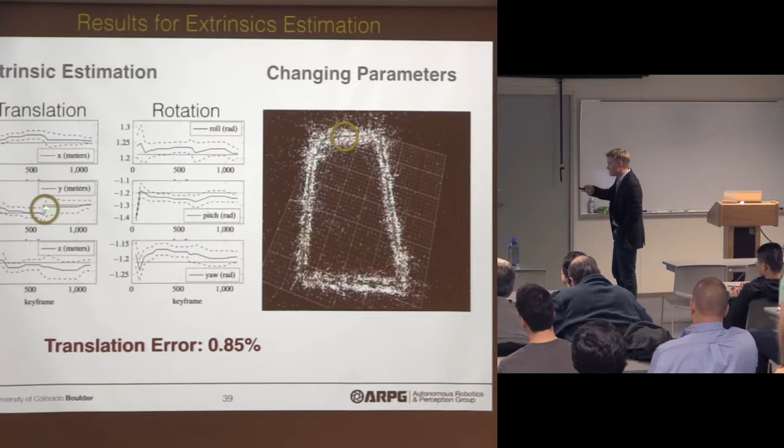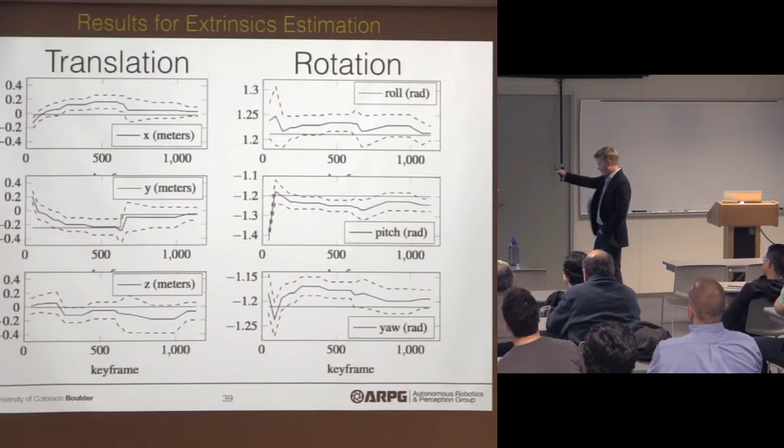So here, this black line is the ground truth parameter. You'll notice that Fernando's gone and moved this sensor by about 0.2 meters, about 20 centimeters. So this black line has gone up, and the blue line is the current estimate for those parameters in time. The red line is the confidence interval for it. You'll notice that even throughout this, there are no other kinds of changes that were noticed - Fernando just moved along one axis.

So here's the experiment. We're operating outdoors. Here's the same showing of features as they're being tracked in time, and on the right-hand side is that 3D landmark and pose graph that I was talking about before.

On the left, you see these green lines, which are the instantaneous candidate segments that would be applied if one thought these were the actual parameters of the rig. And the red line is the estimate, the current applied estimate. So here's just a video of the robot moving outside - we're rescaling on the left, and building the pose graph up here.

Notice that actually moving this robot in front of one of those targets would be quite challenging. Moving a large car is impossible. So here, Fernando's gone ahead and moved the camera on this rig.

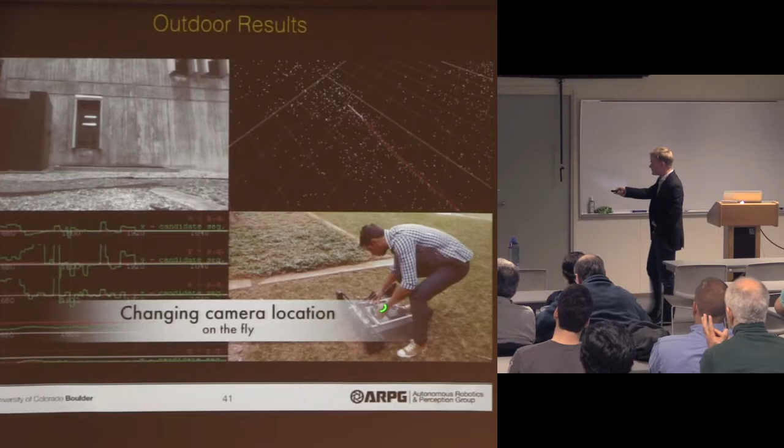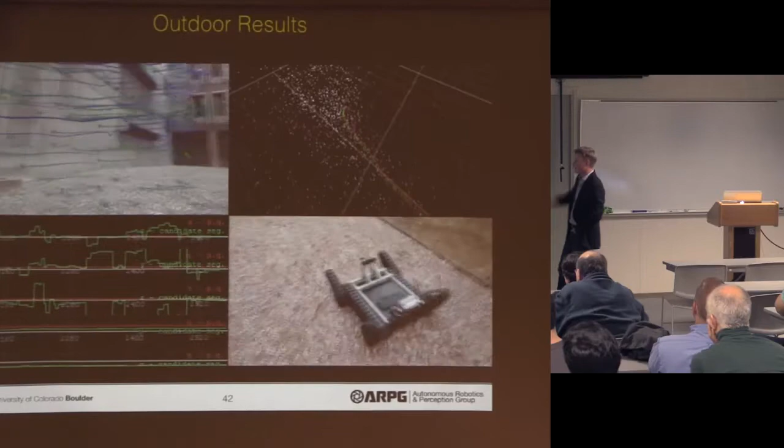And what's happened here is that there's a repair of the pose graph as mentioned. Down here, there are re-estimated parameters in time. And so this is the new set of parameters which have been applied, and therefore they're now being used in order to do simultaneous localization and mapping on this robot.

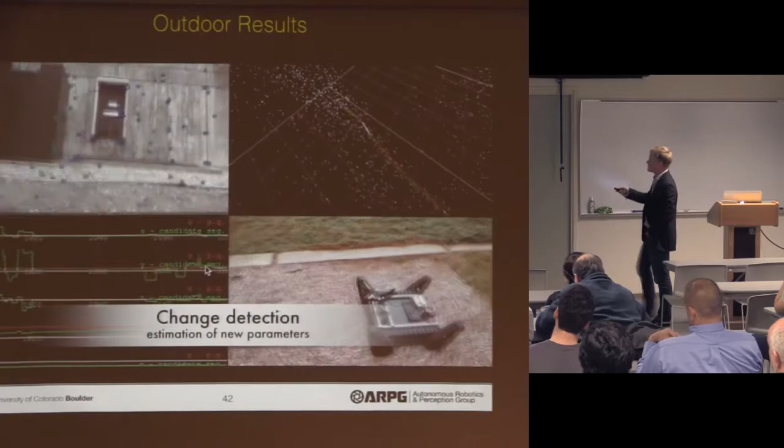So what's going to happen is we're going to complete this loop in just a second. Well, we didn't complete the loop completely, but we drove all the way around, and the pose graph ended up basically on itself, which means that we completed the loop that we expected. So that's the implementation detail of this one example.

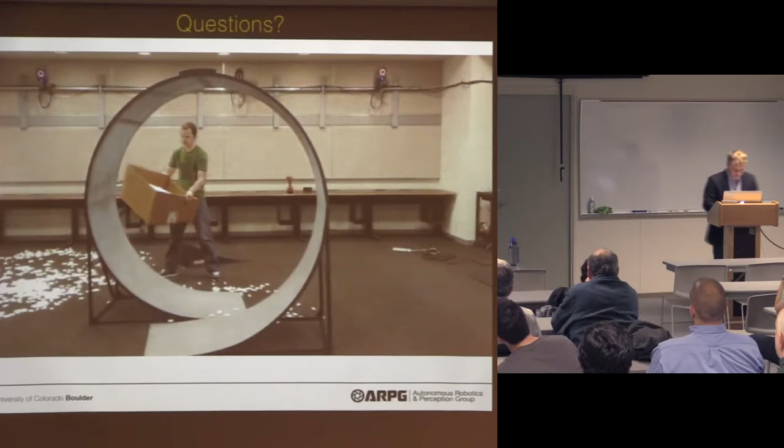And with that, I will show this blooper reel, I hope. Oh no! One second, let me figure out. Okay, well, that's really sad. I wanted to show that because basically we had a time series of people trying to drive this vehicle through the loop and obviously just failing miserably. But let me see if I can bring it up. But that's all I had prepared for slides.

Yeah, so do you ever think about control for calibration? So if you can take control actions because you want to achieve some goal, or you can take control actions because you know that your sensors are wrong, and if you just look over to the side, there's a really good landmark that might help you figure out how your sensor has been bumped off course.

Yes, this joint optimization problem is one that I think is very interesting, in two ways. First, very few people do this control-perception feedback right now, and that's not to say nobody does, but it's rarer in the robotics community. What was being mentioned was whether or not you can choose to control your vehicle such that some parameters are more observable. There's a team at USC asking whether we can get good confidence scores on some of these parameters, which is already an interesting question, since whether a parameter is observable requires some knowledge of the noise profile and uncertainties. The second question is, can we suggest good motions to an operator, or a control sequence, such that we will be able to find what those parameters truly are? I will say yes, we are working on that problem right now. We're starting with the most naive approach: we say the covariance on one parameter is so high, and what does that mean realistically for our system? Can we impose a certain kind of motion such that we will drop the covariance or uncertainty on that one parameter? But in some cases that's quite hard. For instance, you don't want to roll a vehicle, so trying to render that parameter observable might be quite challenging. We are still working on how that might be possible.